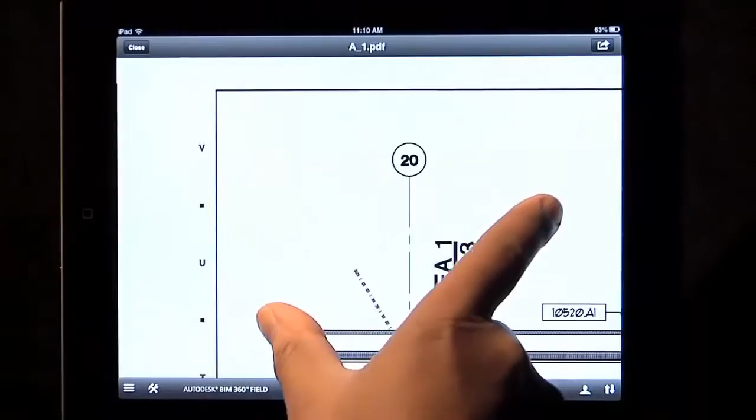An important feature of using BIM 360 Field is that you synchronize with the database and choose just the files you want or need in the field. This helps provide you with the right versions of the data at the right time. We can pan and zoom around this document as needed very quickly and efficiently.

Note that the BIM 360 Field website is the place that hosts all the data, but on the iPad, you can have contextual information. This means that you only need to have the data you care about for a specific action, activity, day, or set of tasks you are working on, making the system faster and more efficient for your needs now.

Next, we will complete a quality inspection and start with a set of templates for quality control checklists. These are either pulled from your company's master library, imported from Microsoft Excel, or you can leverage our built-in content. The point is that they can be configured by your project team and can be specific to the project, or in this case, specific tasks like above the ceiling close-in.

We simply work our way down the list, picking yes, no, true, false, pass, fail, or however the checklist is configured for this specific activity.

You may also notice the little icon here above the issue button, the blue eye. The blue eye is how the project team can provide information to the inspector about what the installation should look like so they can confirm whether the observation is in or out of conformance.

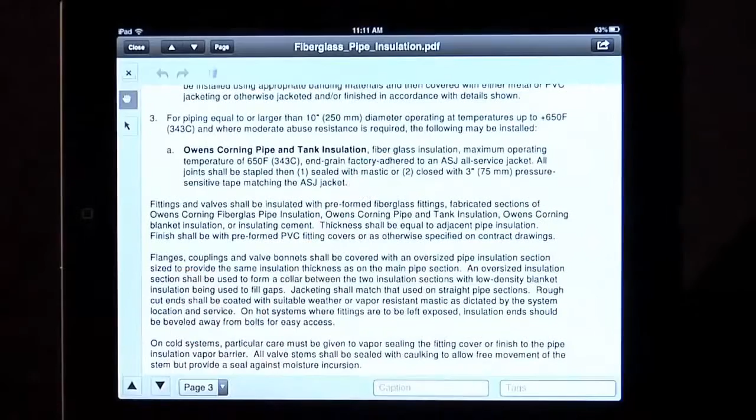A specification, a photo of what conforming install looks like, other supporting documents, they all can be attached to the checklist item to enable easy access to valuable inspection data. Here we can see the specification for the pipe insulation displayed, denoting how the insulation is supposed to be installed. Having this data at the inspector's fingertips helps the project team establish a standard of conformance for this and all observations moving forward.

Whenever we mark an item as non-conforming, it creates an issue in the database. The issue will have a unique ID number, a type for follow-up and for reporting, a company it's assigned to, a status, and so on. All the fields are configured to have the information we need for our inspection, tracking, and reporting.

The description for the issue is pre-populated with the text we need already, but we can also add comments and notes as needed. We then add attachments to these issues, where we are given the choice to use the built-in camera on the iPad or attach a file or plan from the library.

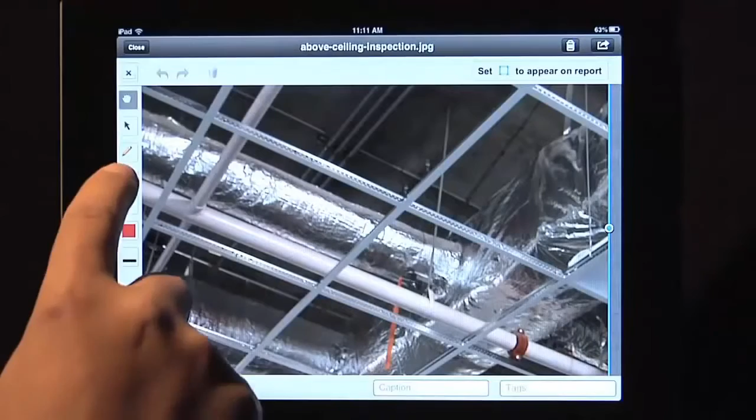We can mark up that photo by drawing and highlighting details about the issue, tap out a caption, add text, whatever we need to communicate the issue details.

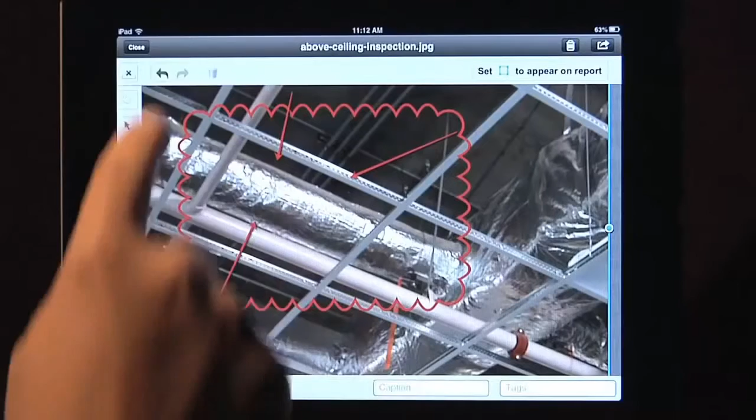We can also attach PDFs, before and after photos, or however many documents we need to more accurately and effectively communicate the issue.

We can also view a list of issues, just like if we had a notebook and pen to track items that need to be followed up on. We see the other issues that were created, but can simply click the plus sign and add another one as needed.

This list view is also great for reviewing items that have been completed or need reinspection, where we can simply tap a new status for an issue and see other information about them by simply selecting them from the list.

Another way to capture issues in the field is to add push pins to drawings. This is the equivalent to taking a paper drawing out in the field and making notes and markups on the paper where we find issues. Here, we take the digital plan, browse to the area in question, again panning and zooming as needed, and drop push pins on the area of the issue.

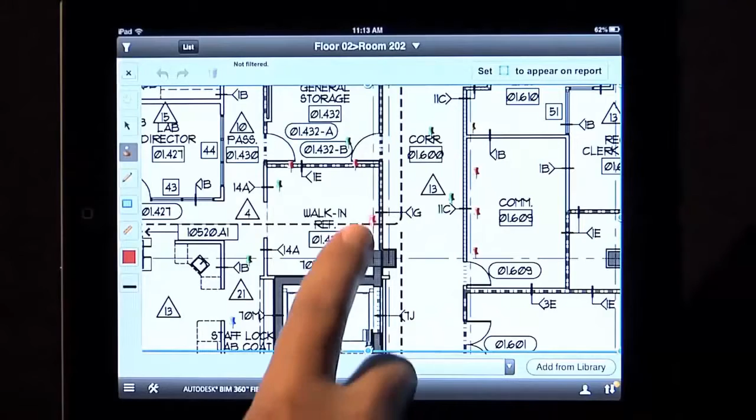We simply repeat the process for all the issues we find in the location. By using the Issue Template button, we create multiple issues by just touching a finger to the screen. It's fast and easy, and each one is able to be tracked separately. This is the same as adding issues from a checklist like we did previously, and because we are using the

issue templates, we have all the same configurable fields the project team has put in place. Let's now take a look at tracking the installation and startup of equipment using BIM 360 Field. Here we see the equipment view on the iPad. We have all the fields your project team can configure for the equipment with details about the individual pieces as well as field information that can and will be collected during the commissioning process. We can also view checklists, issues, attachments such as operating manuals, specifications, and any other documents or information you need attached to the equipment to reference in the field.

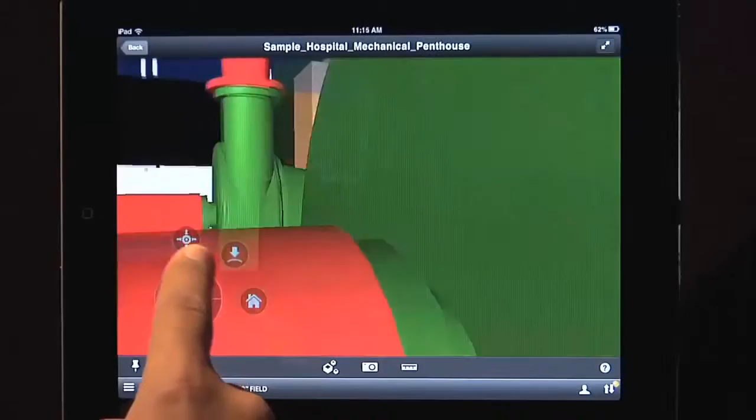The important takeaway here is that the field personnel can get all the information they need. Lastly, we note that we can also view the equipment in a model. This is where we extend the field management capabilities further with the use of building information models, or BIM. Here is the building information model coming from Autodesk Navisworks Simulate or Manage, downloaded to the iPad where we can pan, zoom, walk, and view the model however we need. The pump we were working with is highlighted in the mechanical room of our project.

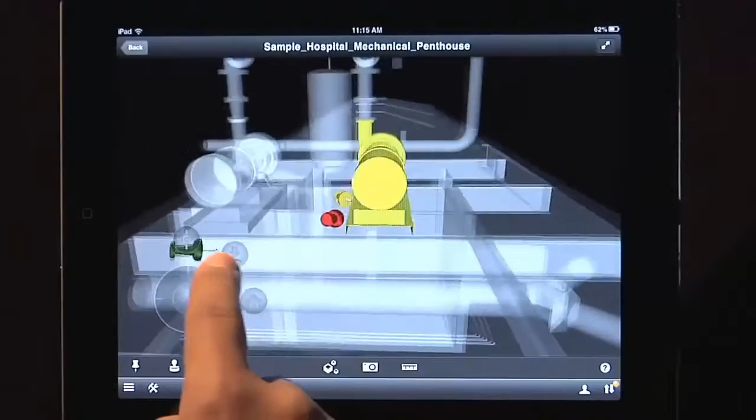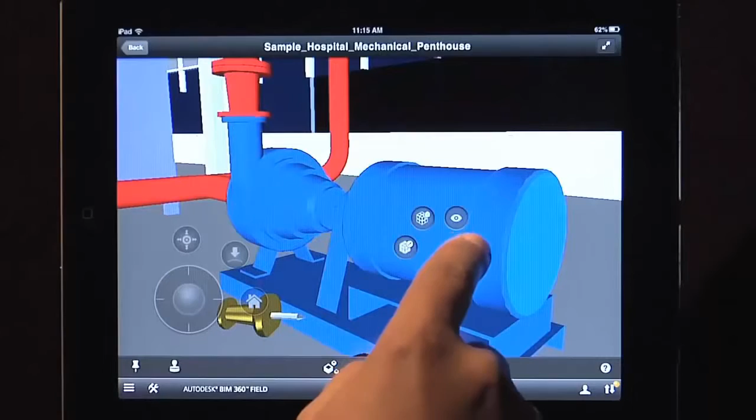We use intuitive gestures to move around the model. We can quickly hide or display model elements to better see the information for the task at hand, with full information model available to interact with. While exploring the model here on the iPad, we can also make observations with pushpins, just like we had with a plan before.

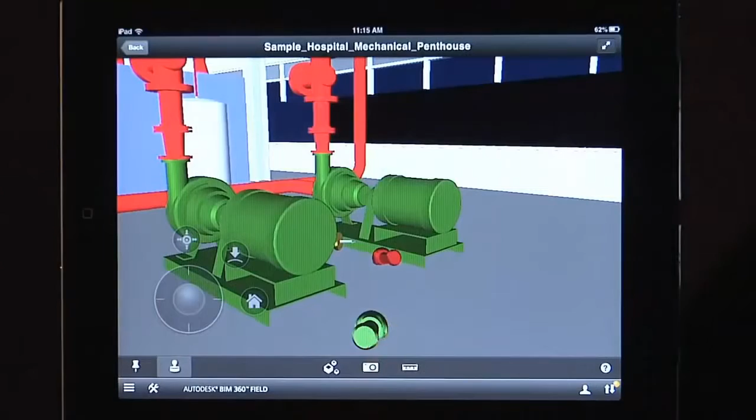Let's say that while inspecting the pump, we notice a crack in the floor near the base. We again use the issue templates and can easily add a pushpin in the model, denoting the issue and add the appropriate details to the issue.

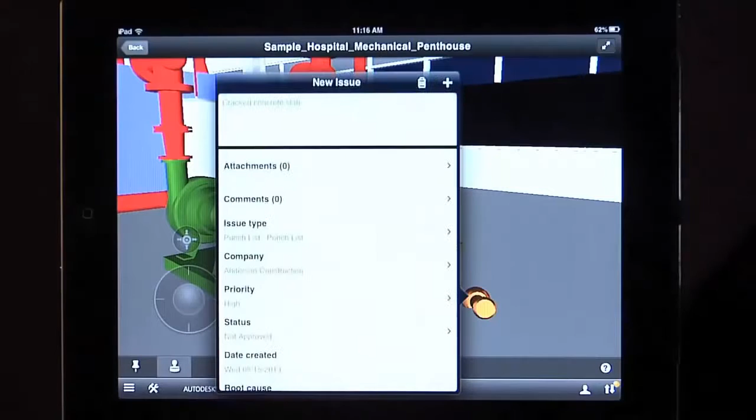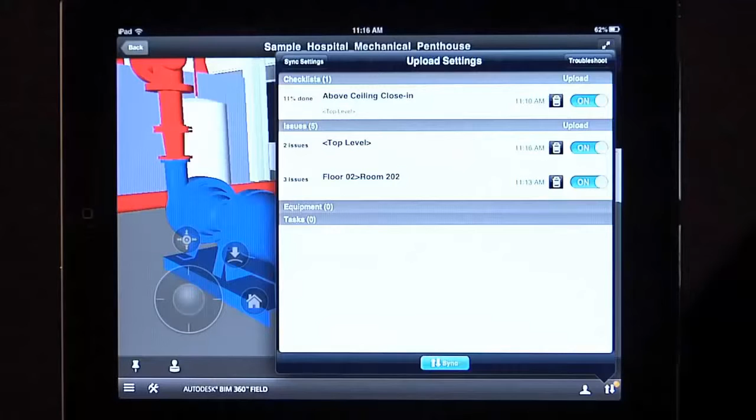Once I have the list of all the issues found, as well as the checklist we've worked on, we simply return to the job site trailer or somewhere there is an internet connection and synchronize the information to the project database. Once uploaded, the information collected will be available for reports to be run and the entire project team to see. At the same time we upload, we also download any new or updated information from the project that is needed, such as new documents, updated checklists, or other issues that we may want to backcheck in the field for follow-up.

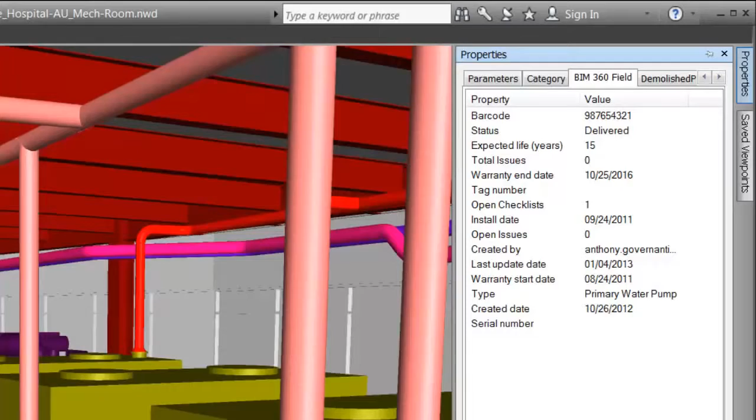Let's now take a look at how this valuable field information can be leveraged by other project stakeholders back in the office. Here we see the model in an Autodesk Navisworks software product and see that there is a tab added to its properties specific to BIM 360 Field. Having this information inside our building information model extends the intelligent data that is coming from the field into our other construction activities and helps to integrate the workflows between office and field from pre-construction planning through coordination construction, commissioning,

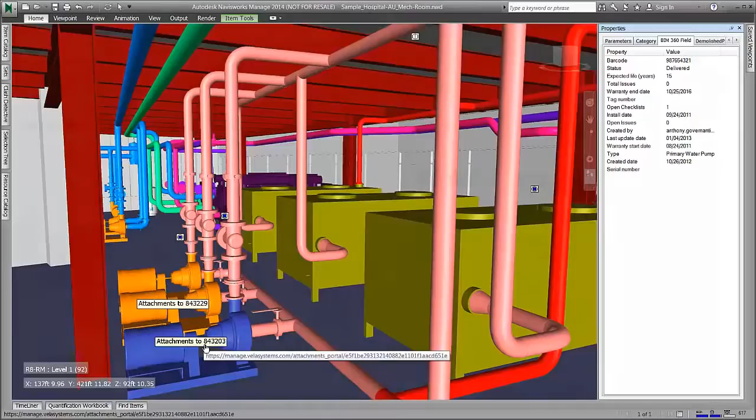and eventually handover. We have the same live links to the attachments from BIM 360 Field here in the model as well, like operation manuals or specifications. We can also use that field information to visually impact our model, as seen here with an appearance change for the pumps that have been fully installed, been received, or have had startup tests done.

Finally, let's go over the BIM 360 Field website, where all the information that is coming from the field management activities on the iPad can be viewed, organized, and reported on. We have project-specific dashboards that are defined by the individual user to show the data and analysis they need most often. We view the issues for the project, see all of the issues project-wide, but also use filters to get just the data we need quickly.

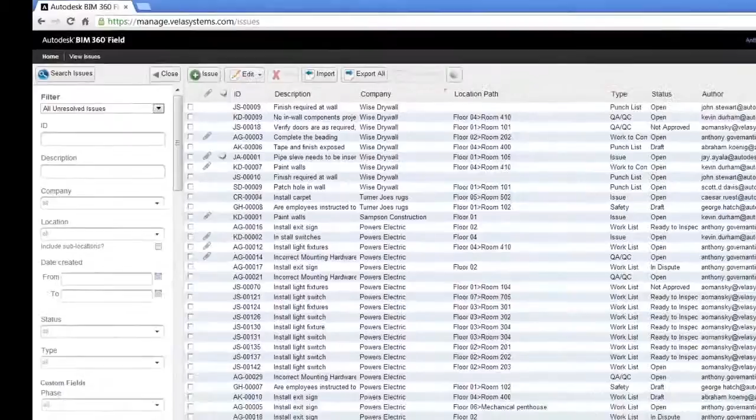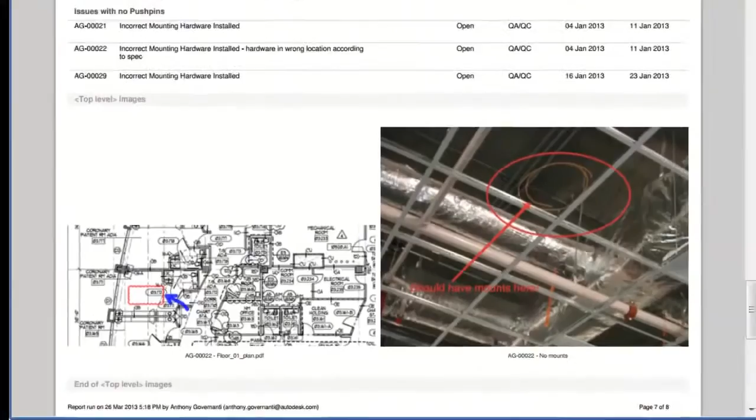We have an easy-to-use and navigate interface where we can view the lists and then at any time dig into the details quickly. We also have reports that can be run showing pushpins for issues, all sorted as we need them. In this report, things are grouped by a subcontractor, color-coded by status, and include any attachments, photos, and markups associated with the items being reported. The equipment database we saw earlier on the iPad is also available via the website, where again we can see a whole project view or use filters to get just the components we need.

Let's review some of the value of using a field management process with Autodesk BIM 360 Field for your infrastructure and building projects today. First, you have an opportunity to win more business by demonstrating your ability to take advantage of the revolution in mobility in construction and bring owners more accurate and timely information about their project from the field. You can improve profitability by helping to accelerate project schedules through increased efficiency in the field and minimize profit-eating rework by implementing quality and safety management programs.

And lastly, you can drive higher conformance across all areas of execution by leveraging quality and safety reports and dashboards, as well as conducting ongoing assessments of subcontractors, projects, and teams with timely and more accurate construction data.